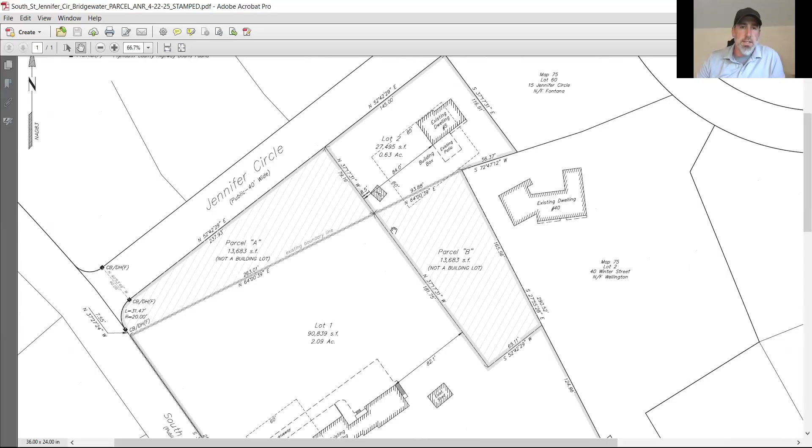Can answer any questions. So are there any board questions for Mr. Klum? Any board comments?

We did receive the staff memo from Mr. O'Brien. Mr. O'Brien, do you want to comment on it? No, I guess it was surprising to see this after the previous ANR, but once Luke explained it right there, it makes sense. Doesn't really affect anything from the previous ANR, so I'm okay with this. Okay, and both of those parcels are listed as not buildable lots.

All right, if there are any other staff or board comments or questions? If not, do we have a motion to endorse? So moved. Second.

Hold on, I lost my list. All right, so motion by Mr. McDonald, second by Mr. Haley. Is that correct? Correct. All right, so I'll take the roll.

Mr. Geller, yes. Mr. Pratty, yes. I was told that I might not be able to vote on this. Well, this is new business, so I think the only thing that you haven't sat in enough meetings on this evening would be 43R as well as Mansion Way. Mansion Way as well? Okay, yes, then yes. Mr. McDonald, yes.

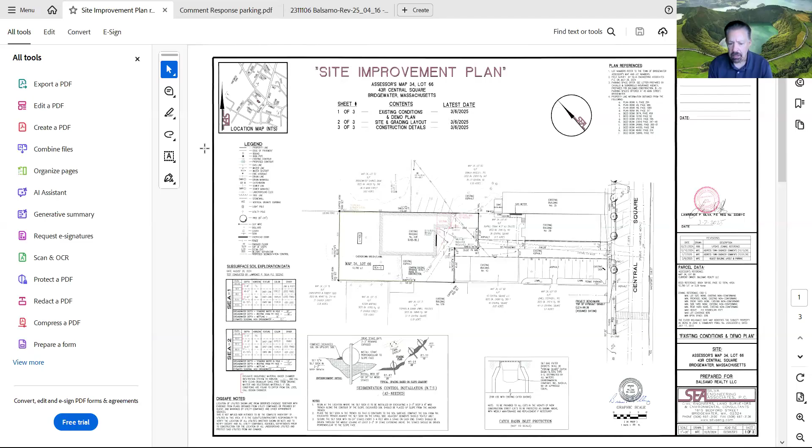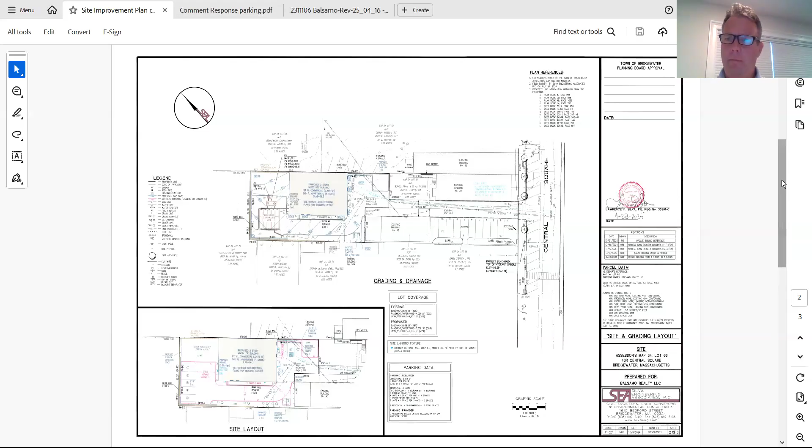We made sure our site plan was consistent with Matt's. Can you blow that up a little bit so people can see it better if possible? Yeah, I'm trying to figure out what you guys are actually seeing here. Hold on, it shows full screen with me. So I can probably change this. If you can zoom in maybe once more. Sure.

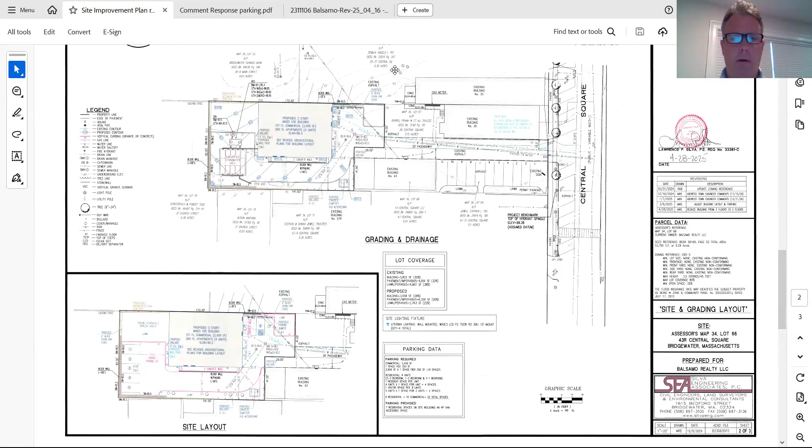Let me see. Does that help at all? No, my screen, I see it full. Bear with me. Let me stop sharing and reopen again. Well, that was pretty good. Oh, it was? Is that all right there? Yeah, what does the board think? I can see it a little bit better if that helps. A little better. That's strange, because I see it as a full screen. That's all right, go ahead. If people have questions we can address them, but go ahead. If you need me to zoom in on something, I can do that too. Go ahead, sorry, Larry.

So did you have a specific question, Pat? No, I think go ahead. I think you provided some updates from the last plan, so if you could, I think you provided the curbing.

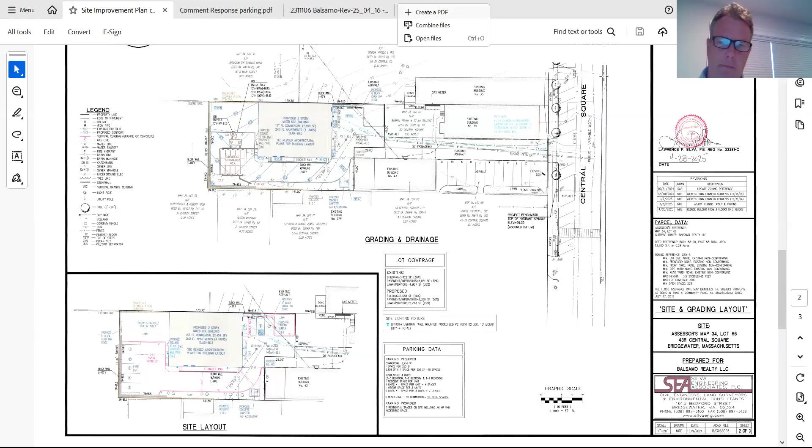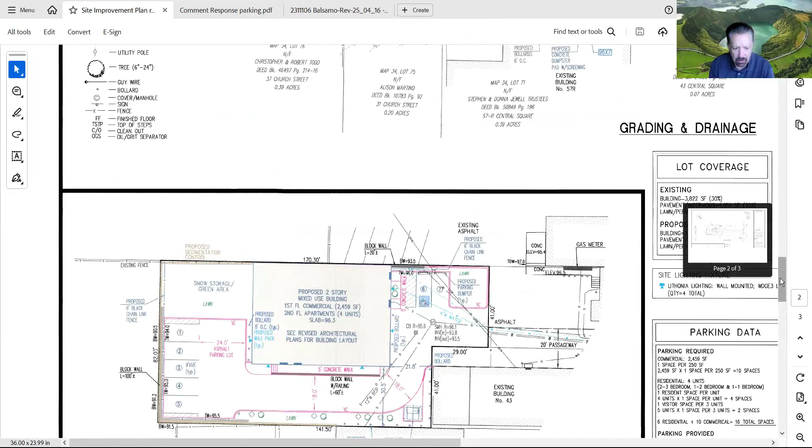Is that correct? Yeah, in the front there, next to space number 7, that area it was asked that we curb that area, so we added that to the curbing in that front area. So that has the vertical curbing there. As you can see, the note says vertical curbing, and then there's another definition in the legend that says that's either vertical granite or vertical concrete. The client asked that we be flexible about that, because whichever one he may have more access to in order to be able to utilize there.

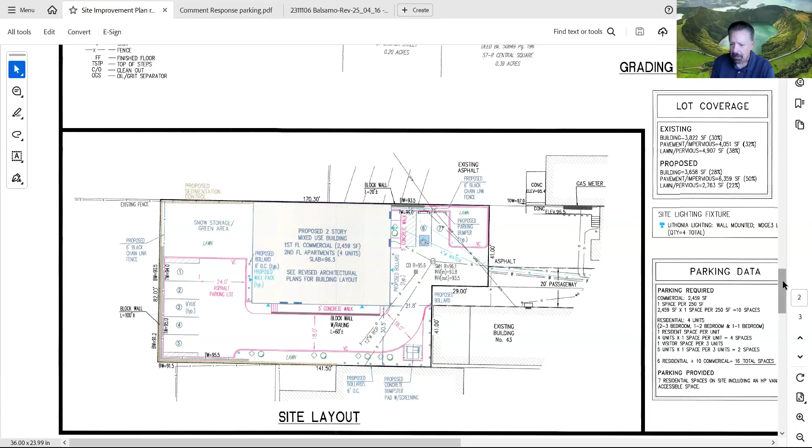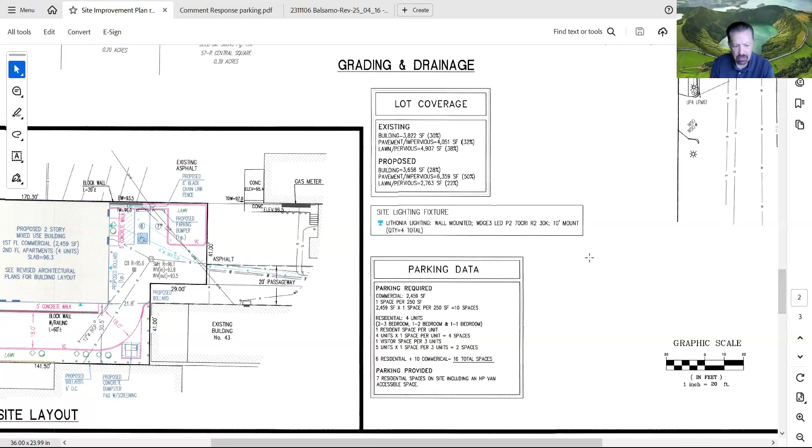We made adjustments. There is one little typo that I saw in the parking data, where it said visitors 1 per 3, it said 5 units under it, it should have said 4. Halfway down through that parking there, below the one that says visitor space, that one should say 4 right there. I apologize for that, we'll make sure on the final one that it says that. In essence, what's happened here is that we're providing for the parking for the 4 residential units, and then we have the accessible space in the front also available.

So there's 6 required for the 4 residential units. But what I submitted was a request or an explanation about the no-loss-of-parking provision in the bylaw.

So we're asking for the special permit to basically show that what's being proposed is not a loss in parking. There were attempts to try to get off-street parking to support a commercial use here, but our client indicated he was unsuccessful in doing that. And as such, we've gone down to the 2-story.

We're indicating that even though there are 4 residential units and there has to be 1 space for each one, the other 2, which are for visitor parking, could have signage that leaves them open for either residential or commercial during daytime hours, but after 6 it's strictly residential. That might help with the space out front, number 7, where that one could be actually available for that use during the daytime.

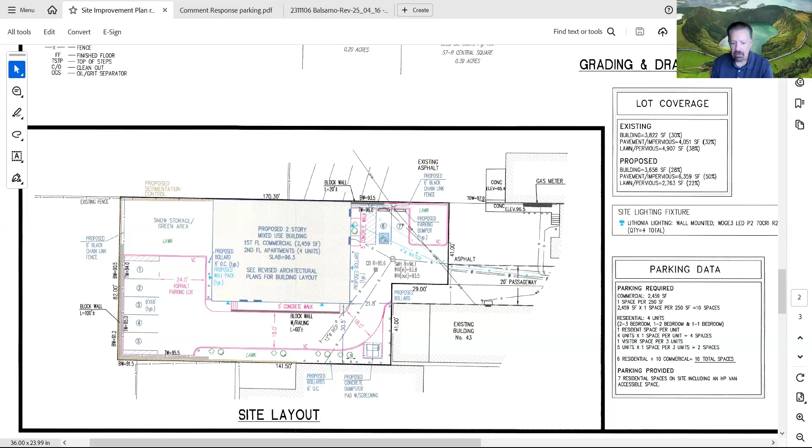It's been so many times that we've been through this. I don't believe that there was a specific outline of those plantings. I think that they were just shown as areas that would be planted.

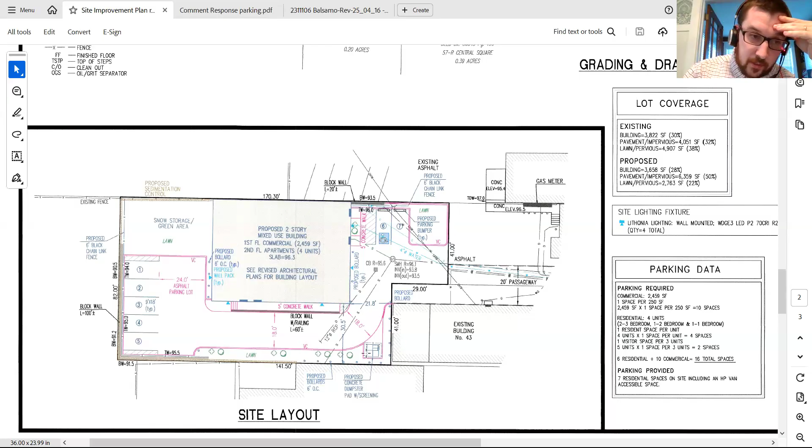Okay, just to refresh my memory, Shane, did we ask for a landscape plan? I don't think it did. I don't think we've asked for a landscaping plan. I think we've just been looking at other things, more small shrubbery, not so much shade trees. So I know that we've looked at it from a small plantings perspective, but nothing discussing any shade trees at the location.

All right. What about, Mr. Holmes, does anybody have any questions just on the updated site plan, and we can come back to it if we need to from the board?

I need to step away for 1 second. There was a huge bang on my house, I got to just take 1 second.

So I'll open it up to board questions for the applicant. Or do we want to wait till Mr. Silver's back? You can probably ask the question, and then if between Jim and I, if we don't know the direct answer, we can refer to Larry when he comes back, if that helps.

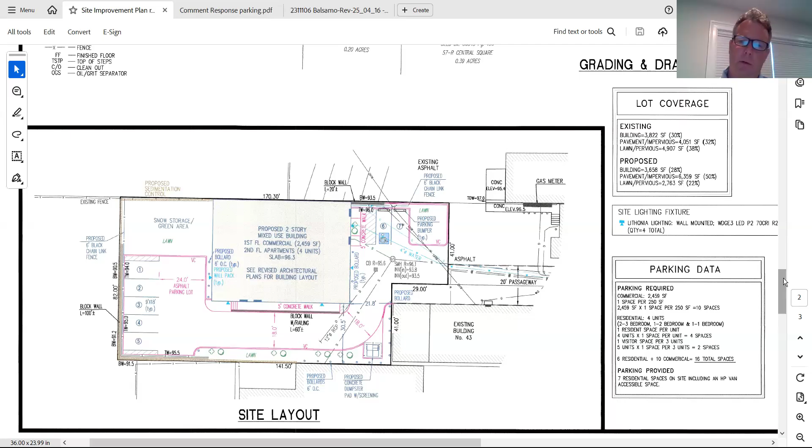So I had some questions on the right of way, Shane, just to make sure — last time we talked about the disturbance in the right of way for the utilities. I didn't see anything provided in terms of a summary of how that would be repaired.

I mean, I know we talked about keeping everything to one side, and that 10 feet would be completely repaved, and that could be a condition. But did you provide any specs on that, Larry, about what would be repaved and what wouldn't be repaved?

No, I think that Jim, Mr. Balsamo actually indicated what his plans were in terms of paving at the last meeting. But we did look at — wow, we got something happening here.

I apologize, there's something huge bangs that are happening right now. I thought you were in the Azores. No.

We did look at it, and we kept the utility changes to the best that we could on the second half of the 20-foot passageway. We tried to do that. They are difficult because, to some extent, where those water and gas lines actually are in the pavement are not clearly marked by the utility company — they give you a rough idea. But for the new line that we have to bring in, we kept it on the upper side, for the 4-inch water line that has to come in.

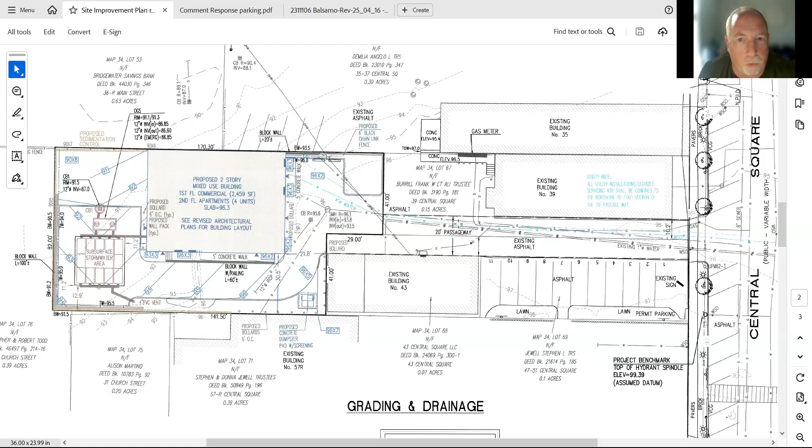So Chair, if I remember correctly, I think the applicant said that he would not leave a trench, that he would actually make it like an L shape if he had to, and pave the whole thing, not just patch it. That's correct.

So we did receive some correspondence, maybe that can come up later, about one of the potential right of ways not being correct, or the wrong deed that was presented to us, brought up at the last meeting. Did you guys look into that at all, or do we have the accurate deed?

The attorney is the one that provided that information to you. I think what was indicated was that when looking at the neighboring property, what was provided to you was an easement that's not germane to this. The actual easement that pertains to 47 to 51 Central Square...

Well, is that really what it is? I guess it's the 10-foot portion of the 20-foot right of way. So their easements, to the best that I can see, do not show that they have full use of the 20-foot passageway, but they do have use of 10 feet of that passageway.

If Mr. Jewell is on tonight, she might want to clarify that further, but that's what their deed shows. And I don't think that's what was provided to the board. I think a different easement was shown to the board.

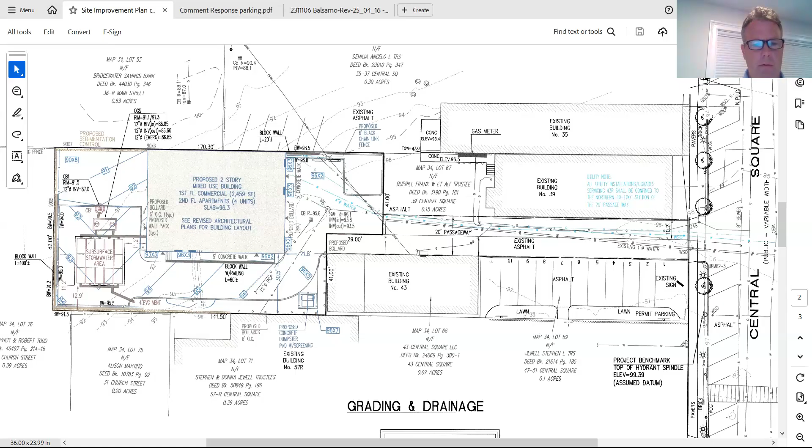There is a fence shown. There was an existing fence along that stretch. Is that a new fence now? Is that vinyl? Is that stockade? Is that listed anywhere in there? I don't believe there was any designated change in a fence on top of that was indicated to the board.

I think the wall was indicated. I thought there was a fence there to block, because cars would be parking right there and shining into that. Wasn't there a fence proposed on top of that? There's nothing that would be shining in that direction, because that's a vacant, grassed area to the rear of the property.

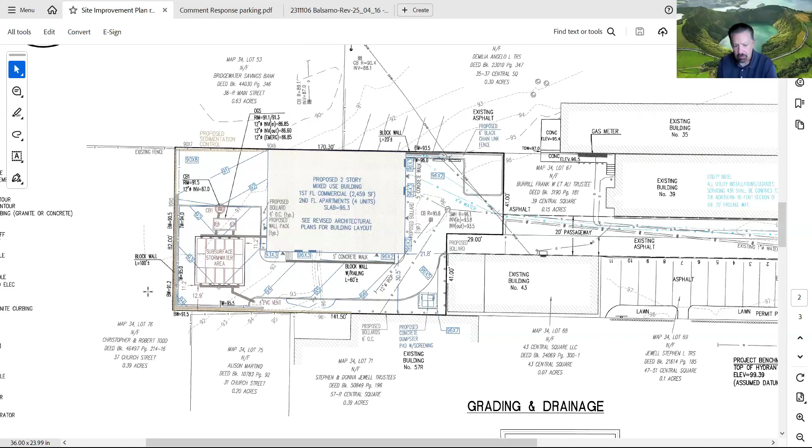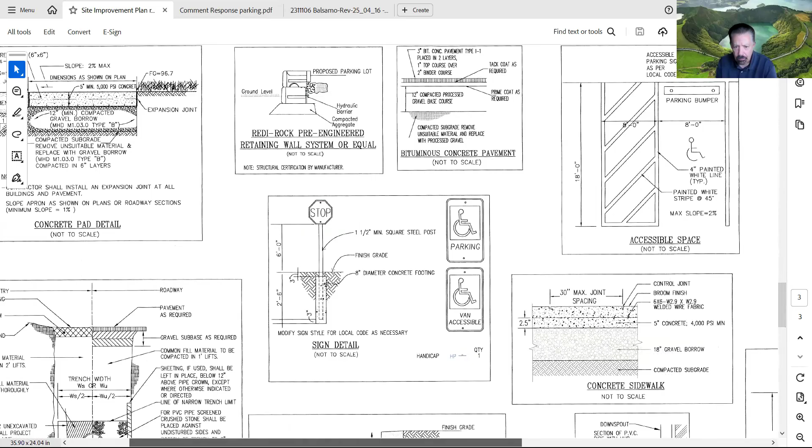I thought on the detail sheets they were showing some sort of slat or vinyl fence, some screening. If we go to the detail page, we might see whether it was actually called out on the block wall detail. The block wall detail just shows the block wall. Shane, where were you making reference to, a different detail? There was information, I think, on an old plan, because we were talking about off-site lighting, and that's why I couldn't see it on this set.

That's why I was looking. Yeah, it was on a previous set. There's a fence detail there, but it doesn't necessarily say in plan view that it runs along that entire parking area.

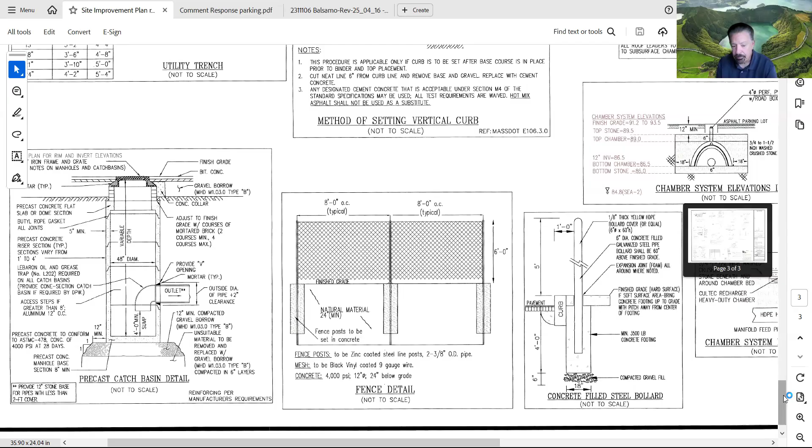Can I step in? On top of that wall there would be a 6-foot chain link fence with black privacy fabric. Okay, that's what I thought we saw at some point. All right, all right.

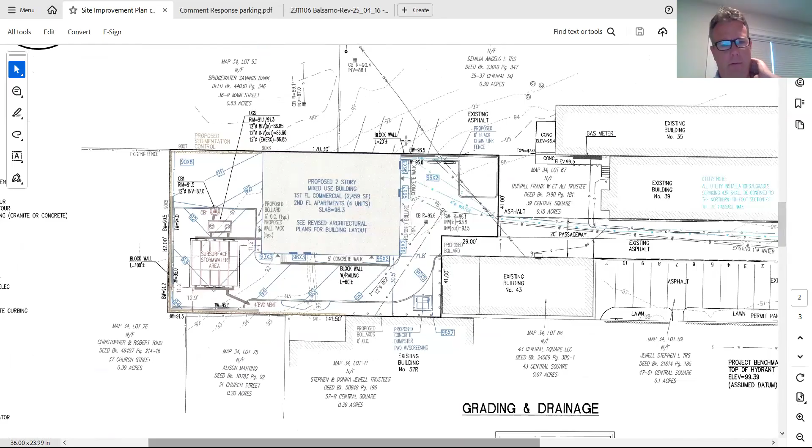And then more to Mr. Holmes, I know, and maybe for the public's benefit, if you could bring up... well, actually, before we go into those, I'll open it up to any other board member questions on the site plan.

Pat, could I ask a question? Sure, Mr. Praddy, go ahead. Larry, just very quickly, I'm not sure about this right of way, but I know looking back in older deeds that I had access to some time ago, some right of ways are specified for horse-drawn cart, some for foot traffic. Is there any designation on this right of way for commercial as opposed to residential, and must it be updated?

These right of ways go back a long time, and they talk about them as passageways. They're not that specific.

They were done and granted in a pre-automobile kind of time frame, but they've been in place and utilized long after automobiles came into use. Frito-Lay used to work out of this building in the back, and it was a furniture upholsterer. There were a lot of different commercial uses in here. I saw aerials myself of trucks that were in there, and there was a loading dock on the south side of the building that was utilized over its history. So it evolved from being whatever was intended in the beginning, or whatever was the means of travel, to just being a 20-foot passageway.

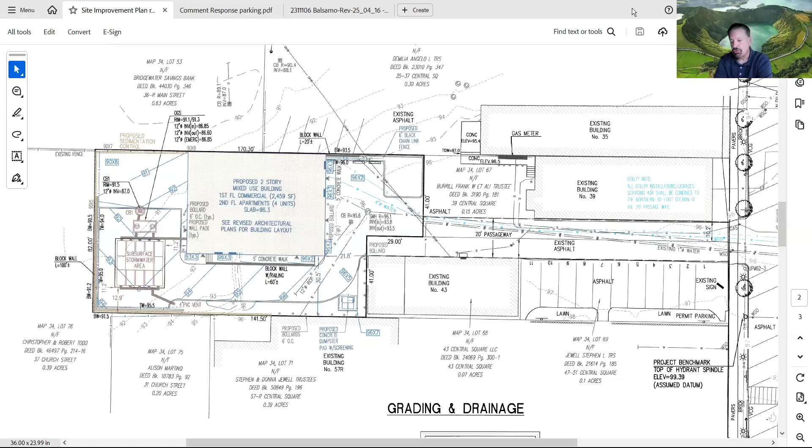But this residential aspect of this particular layout is new. There was nothing in there that precluded it. It didn't say 20-foot passageway for commercial use only. There was never that kind of detail. Well, there was no zoning for residential back there before, was there?

There was no zoning back at the time when that passageway was created. The standard under title is open and notorious use, and all of the uses that Larry has articulated constitute open and notorious use. So residential, commercial, it's been used for an extended period of time for access. I was just asking because I'm not quite sure what is true compared to what was originally done, whether there needed to be an update, but supposedly not. It says in use as in common with abutters, and there are residential abutters using it and commercial abutters using it. So it states that I can use it as they do.

Any other board questions at this point? Nothing at this time. No, I'm good, Pat. You brought up what I was gonna ask of the deed.

I don't know why I thought this, but I'm looking at Mr. Silva's letter. No net loss of parking, right? So for some reason, I thought there was an extra spot on here. I thought there were 8 spots, but...

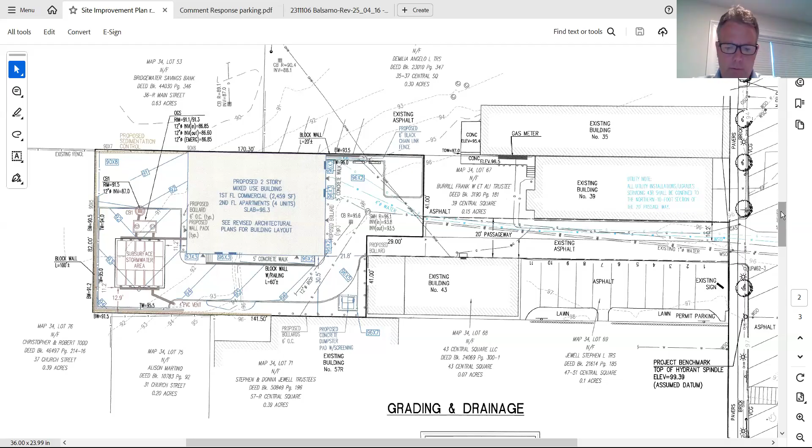Shane, does this meet the no net loss in parking in your opinion? I know you provided a letter on that. Sure, I would say that from all indications from past site plans, there was never really a strong parking layout at the site before. It looked like there were probably 2 or 3 parking spaces utilized for commercial as well as the overhead bay. I feel comfortable with that meeting those special permit requirements.

I think that the intent of the ordinance when it was formulated was to look at properties in the CBD district that have issues. We kind of look at open spaces, something that needs to meet the requirements here, whereas this property meets the open space requirements but takes up a portion of the site that could be utilized for parking, as we've indicated in the past. But in terms of utilization of parking on site, based on that and open space, I think the attempt to have as many parking spaces on site has clearly been tried to be met.

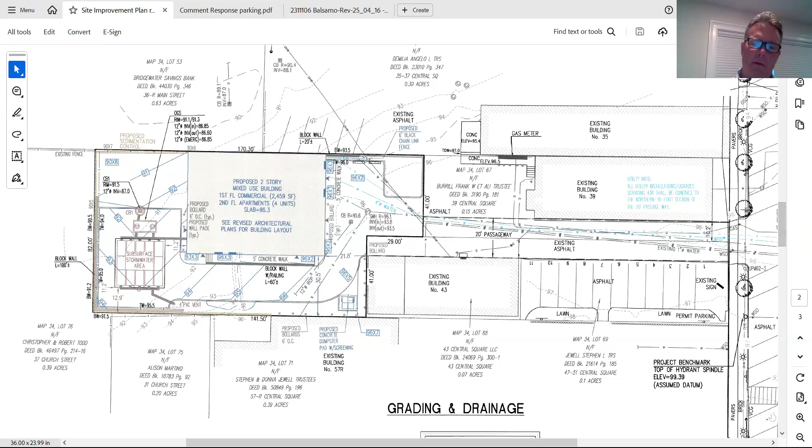Okay, all right, thank you. Any other site questions? Mr. Holmes, could you bring up the architectural plans? Sure. Could you go more to the outside? I know in the past you said you're thinking of this or that, but if we approve or consider approving a materials list, if it changes, it would have to come back for a modification. So is this the palette of colors and spec of materials - is this the final design of materials and things of that nature?

Yes, as far as materials, as far as the walls. Now, one thing that Mr. Balsamo and I have been talking about is whether there's actually going to be a standing seam metal roof or whether we go to an asphalt shingle. That's something we're looking into, and a big part of that is cost - standing seam metal roof is typically 4 times the cost of asphalt. As far as the new added second level, that's going to be a Hardie board type cement fiber board material. The color palette we've discussed, we think a lightish gray might be the best way to go, not making it too obnoxious of a color. It's just kind of understated in that way.

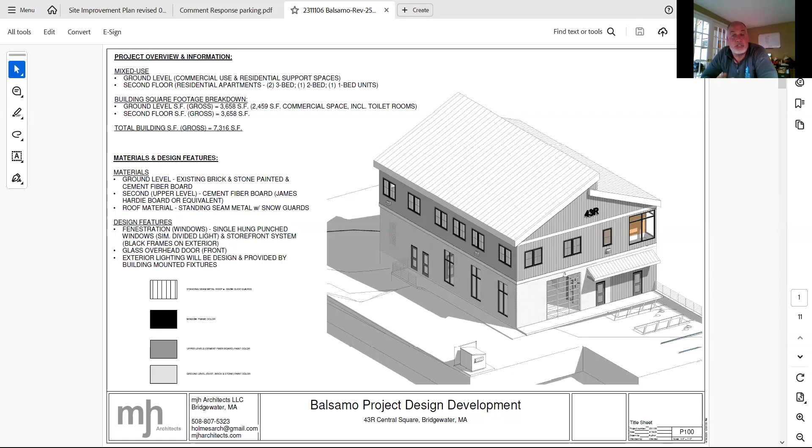One thing is, depending on what happens with the commercial space, I want to mention this. Right now I'm showing this garage with a glass overhead door, and just so everyone knows, this is an existing overhead door right now. We want to keep this because of the options it can bring for commercial use, having an overhead door. It's shown as glass just to show that if a certain type of use goes in there that can utilize an overhead glass door or have some fenestration through it, but depending on what goes in there it could also become more closed off, not a transparent overhead door.

Got any board questions on the architecturals? I could pull some other views too, if needed.

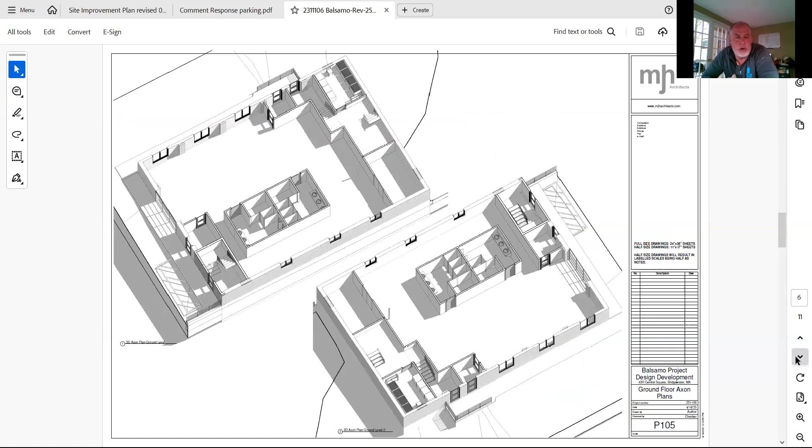Is there a need to go over this at all anymore? Does anyone think, or has the board in the past, vetted the building?

All right, any board questions on the plans? Nope, nothing at this time.

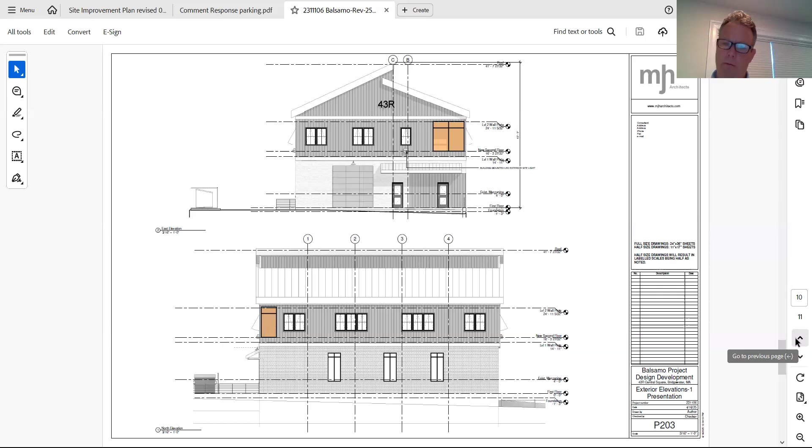All right, Mr. Tanzi, just before we go to public comment, it seems like in your latest letter they've addressed the drainage and other concerns that you had. Are there any outstanding issues from your department? No, there are not.

And Mr. O'Brien, did we hear back from the fire department? I know you made several attempts. Did we hear anything? I did not, as of this time, hear from the fire department regarding any comments on this project.

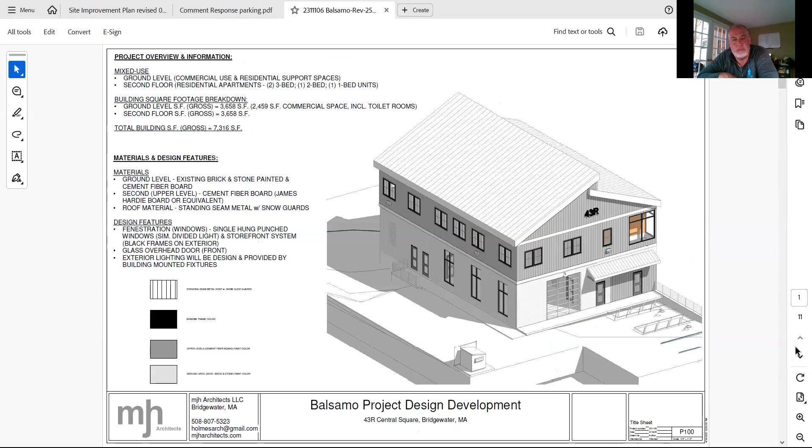Can I just jump in on that? I think Mr. Balsamo would want to as well. Mr. Balsamo and I actually met with the fire department, I'm not sure if you guys were aware of that, just to review everything. Thank you. The fire department had no concerns.

Their only request, and it's not definite, is that in the front landscaped area where we agreed to put a vertical curb, they might rather that be stone, so if they have to access building number 35, their truck can make that swing. That's the only thing they were talking about. We don't have a comment on that, so we can leave it the way it is for now. But that was their only concern; everything else they were fine with.

All right, I'll open it up if the board has any questions on architecturals or the revised site plan or anything like that.

Okay, and I know we did receive, I think, two emails regarding public comments. Is that correct, Shane? Was it just two? Let me be sure. It was either two or three. But I believe it was two. So hopefully everybody had a chance to review those. Yep, I forwarded it along to you guys.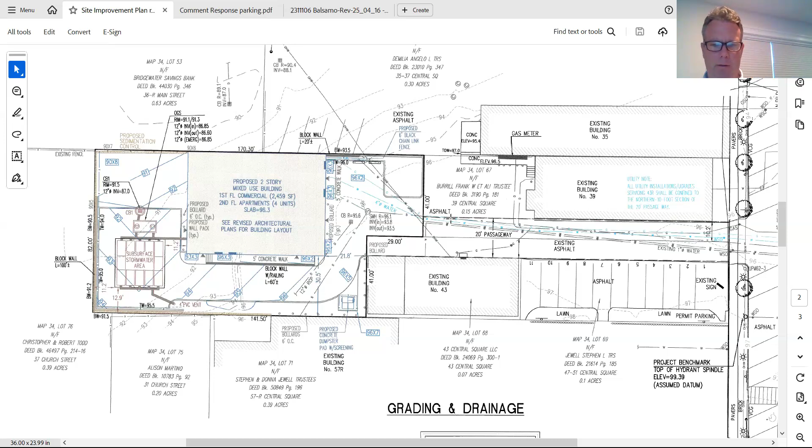All right, so I'll open it up to public comment. I'll have Shane help me manage that, Mr. O'Brien, and if there's anybody that would like to speak, you can raise your hand virtually, or raise your hand if you don't know how to raise it virtually. Please state your name and address for the record, and let's try to keep all comments respectful.

Sure thing. And I actually received three comments, with the one we received today, one the other day, and then one previous to that. But I have a chat from Tony Robinson with their hand raised. Tony, if you would like to speak.

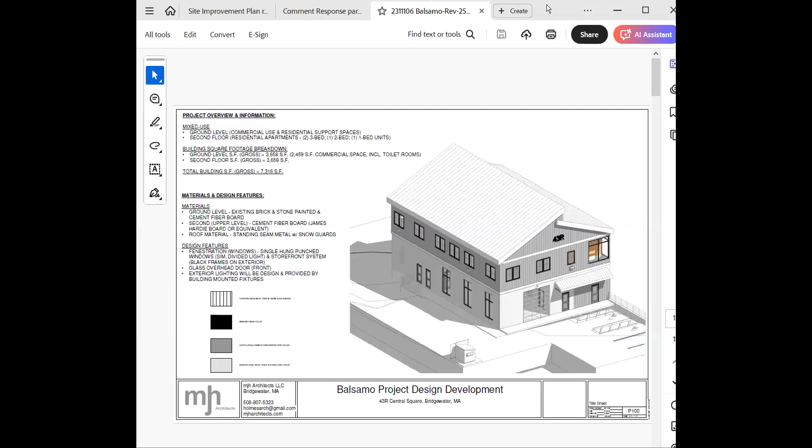Okay, and I also know that when we last talked at the last meeting, I questioned whether the applicant's attorney had reviewed the correct right of way, and Larry Silver and I talked about that, and we identified that it should have been for 47-51 Central Square, not for 57 Central Square. So has your attorney reviewed that to know what's allowed and what isn't allowed?

My attorney has reviewed it and submitted a letter to the board. Okay, how may I access a copy of that letter?

Jan, is that on, do we have that online? I have the original letter that Attorney Bob Pellegrini had sent to us. That was the one dated in January, I think. That would be, I believe, correct, January or February. That would have been the one with the incorrect parcel listed. It should be for the book and page, book 21614, page 185. The one in that January packet was not that parcel.

Mr. Silver, Mr. Holmes, do you want to speak?

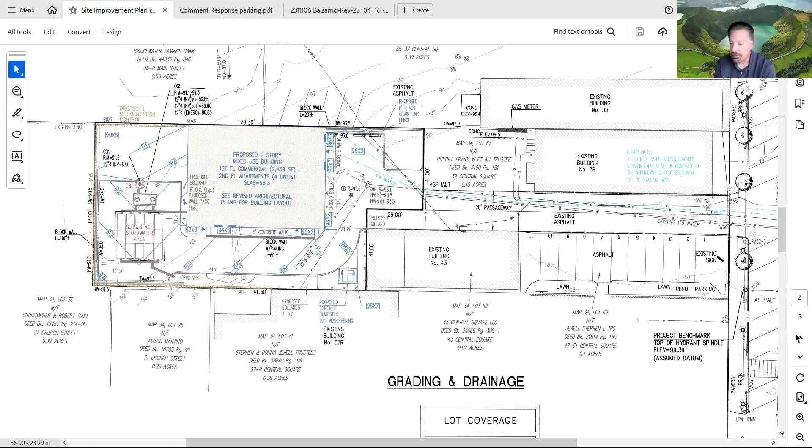That's actually, I agree with what she's saying. There was, I believe, an incorrect reference in that. It referred to another easement that's not related to this project. But to go back to the other question, if you see what's on the screen now, in where the building is for number 39, there's a note up there about all utility installations related to 43R would be in the northern part of the 20-foot passageway.

And then just the last part, I would just want to reiterate, our concern for vehicle and pedestrian safety in the proposed project still remains a concern, even though I appreciate the fact that the size of the project was downsized. But based on that concern, I just want to be open and upfront and tell you that we are considering adding a gate at both ends of our right of way. We know that if we decide to do that, we have to provide access by a key for your tenants or customers to be able to lock or unlock both gates.

But I didn't want to catch anybody by surprise should we decide to go ahead with that. That is allowed by law for that parcel. My deed says unobstructed. Please let me just finish. Unobstructed means we cannot lock the gate. We can put the gate there and provide either keypad access, an unlocked access, or a padlock with a key. We can't lock somebody out, but we can provide them access. I just wanted to state that because I don't want anybody to get caught by surprise down the road should we decide to do that.

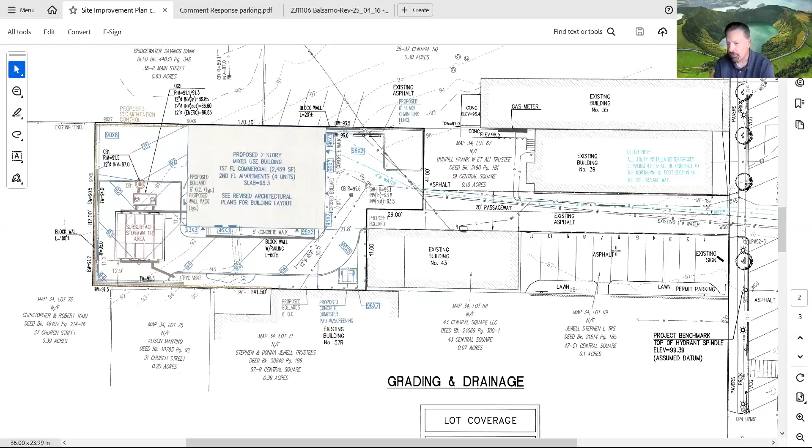It would be looking down towards the project. It would be the right of way that runs along the left-hand side behind the parking spaces, behind the 11 parking spaces that Mr. Silva pointed out earlier, correct? Correct. So the way those cars now, they back out onto that section. And just for the record, it's impossible to back out into a 10-foot right of way without going into the other section in order to go in or out of those spaces.

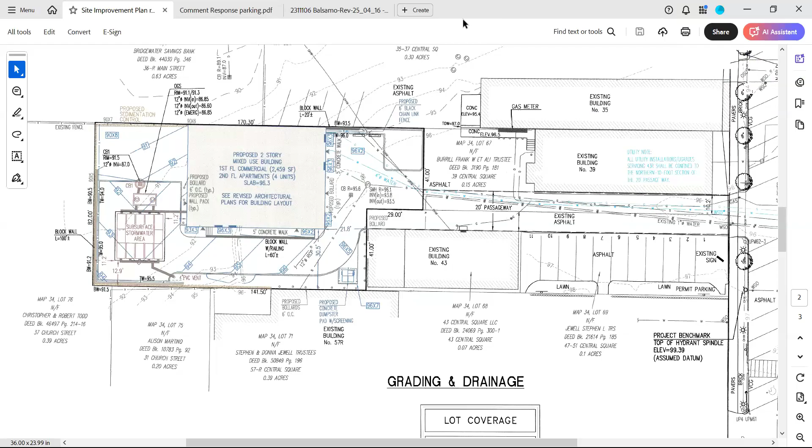Well, it's a little bit more than 10 feet if you pull all the way up. And I knew that was going to come up, and I tried that, and I'm not the best parker, but it worked for me. But anyway, I just didn't want to catch anybody by surprise, and I think it's necessary to look at the correct deed first. That's all, thank you.

Mr. Silva, if I get, there was an earlier comment, Mr. Moore is still on the line here. There was an earlier comment about where would someone park in order to go to a use that's here or whatever. I would suggest that, he knows the Fellowship Lodge, and they don't have much designated parking, maybe behind their building, a few spaces. But if they have an event in their place, people are going to park somewhere else. And I think that's a fair statement, that people find a place to park when they want to go to something they're intending to go to. I don't think this is any different, except that the residential component of it is being provided with parking spaces to meet the regulation.

Thank you, Mr. Silva. We have Mr. Sylvia looking to speak. Shane? Yeah, he's good to go. John, you're good to go. John Sylvia, 43 Central Square. Can you hear me, Shane? Go ahead, Mr. Sylvia, we can hear you.

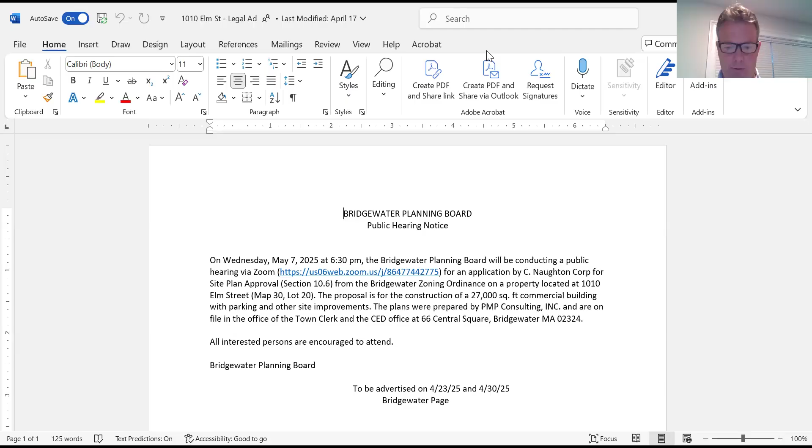This was posted by the Bridgewater Planning Board and advertised on 4/23/25 and 4/30/25 on the Bridgewater page. I believe that's the Brockton Enterprise, is that correct, Mr. O'Brien? That is correct, it's posted in the well-read Brockton Enterprise.

Okay, so you confirm that we have received everything from the applicant, you did send out a packet with a memo. Yep, Mr. Tanzi. I did not see... the one thing I didn't have, we have Mr. Tanzi here, Mr. O'Brien, the one thing I didn't see is a review from Mr. Tanzi. When I clicked on the Bridgewater town comments there were two PDFs and they didn't open.

So I don't know if you can have that prepared. I'll let the applicant respond and provide their presentation, and then I think we can present it too, because one of the things associated with this project is that there's an NOI filing at the same time, so things are getting kind of mixed up in between. But I'll let the applicant explain that process as well.

All right, so we'll turn it over to the applicant at this point and their representatives.

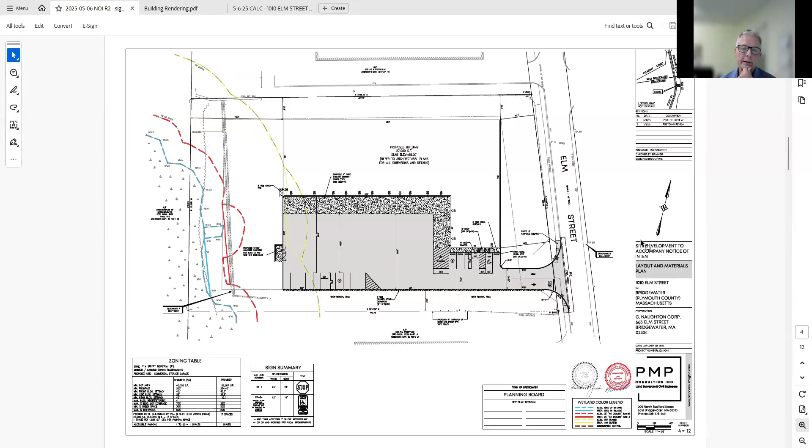It's a 2.4 acre site in the Elm Street Industrial District. You're looking at it there. It's a 27,000 square foot building with associated parking and pavement to go with it. The site right now is mostly clear, sloping approximately 5 feet down from Elm Street down to the wetlands in the back.

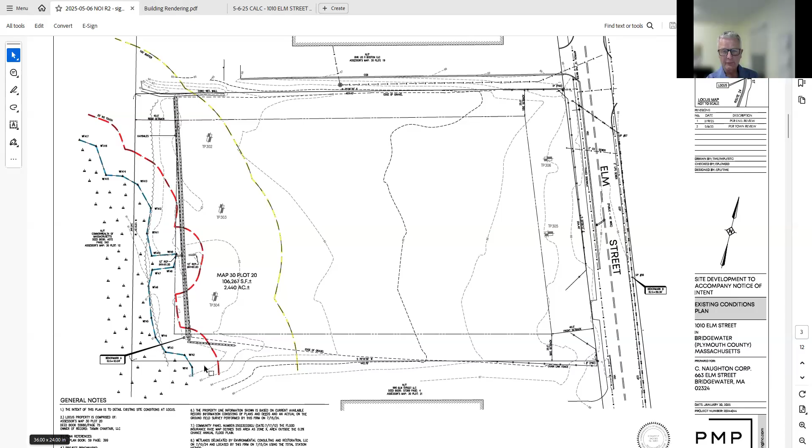It's currently being used by the client for material and trailer storage. The wetlands along the back of the property were delineated by Environmental Consulting and Restoration back in July, and field located by our firm. The building itself, Sammy go back to that layout, will have 10 bays to store vehicles in, along with 2 wash bays. So there'll be 12 total bays, and 2 wash bays included in that.

The bays will be used for vehicle storage. Basically, Mr. Naughton owns a property down the street where he runs his business out of. This will just be to store his trucks at night, bring them into the wash bay, clean them up, and then store them. The building's big enough so he can back the trucks in with trailers on them. In the summertime, there's storage for his winter operations, which would be sanders, plows, things of that nature.

There'll only be 1 employee in the building during the day. He'll just be a mechanic on site in case a truck gets broken down during the day or whatnot, and he'll fix that and wash the trucks at the end of the day and park them in the building.

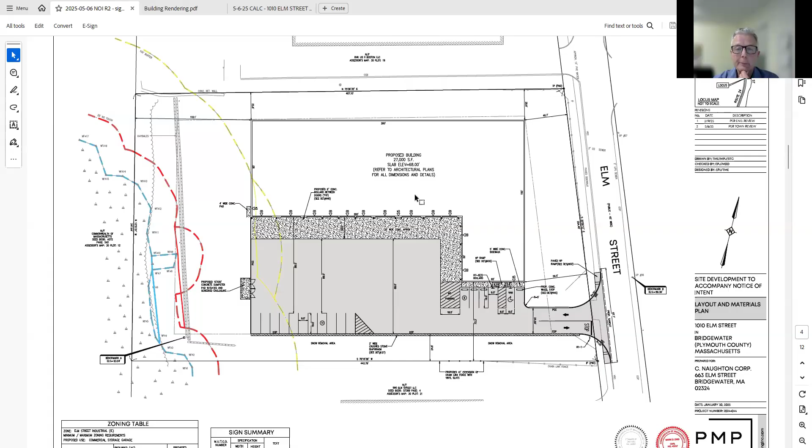The building has floor drains, one in every bay. They'll be connected to an oil water separator out in front of the building, and then that'll be gravity fed over to a sewer manhole, and then it'll be force main up to an existing connection just off the street up there.

We are, as Shane alluded to, going in front of Conservation Commission at the same time. We're just about wrapped up with them. Mr. Tanzi has looked over the stormwater report and the stormwater plan. He had a couple of issues on that, and we sent him over a letter addressing all the comments today. I know he probably hasn't had a chance to look at it, but we believe we've addressed all the comments on his letter, which we received, I believe, on the 2nd.

That's about it. I mean, I can answer any questions that you may have, but that's just a quick overview of the project. Thank you, Mr. Jacobs. And maybe Mr. Tanzi can weigh in on this as well.

I was looking at the site, and it seems like the drainage is basically just sheet drainage, pitched away to that swale, so to speak. Correct. So I guess my question is, when you don't have the traditional catch basins, what pretreatment is there for oil, gas that may be leaking out of a vehicle, things of that nature? If it doesn't go through a conventional storm drain with a hood and it goes directly into the soil, how does that prevent groundwater contamination?

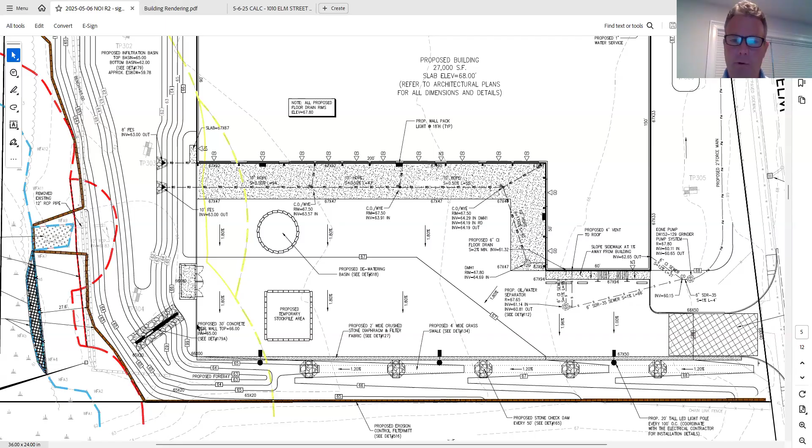I'm just concerned, are there enough safety measures in place, because typically most projects we see have catch basins with curbing that can contain that, and there's hoods and oil water separators and things of that nature that would protect the groundwater in that area. I'm not saying this is wrong. I'm just wondering, is this design appropriate for this use in this location?

Okay, well, I'll let Mr. Tanzi comment on that. Yeah, I see where you're coming from, Mr. Chairman, and your concerns are valid. However, it does conform to the rules and regulations. They do have an oil water separator, an MDC oil water separator, for storage of vehicles inside the building.

If there was a spill or rupture of a tank as truck traffic is entering into the facility, it will be captured in that diaphragm. The diaphragm will have filter fabric where those hydrocarbons would be caught and contained. It would require some immediate action, removal of contaminated stones and the filter fabric, and of course it would have to be replaced. Most likely you'd have to test down 6 inches to make sure there isn't any residual hydrocarbon, and then the pea stone diaphragm would have to be reconstructed.

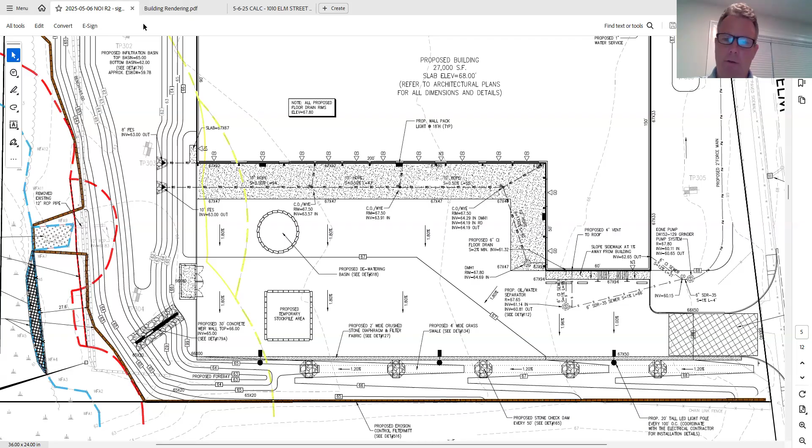Other board members, questions, comments? Yeah, if I may, Mr. Chair. So I'm quite familiar with the Naughton Corp, and the capital materials as a whole.

Mr. Jacobs, did you say there was going to be a couple washing bays on site? Yes, and those are intended to wash both the truck body and the bed. Is that correct? Yep. And where would those drain into? They would drain into the oil and water separator out front. We have a detail on that. If you'd like to see it, but it goes into the oil water separator and then flows into the sewer manhole out near the entrance, and then force main up into the street.

So, excellent. Mr. McDonald, the washing happens inside the building? And there's floor drains, correct? Correct, yep, there's one in every bay. And in that floor drain system, I'm assuming the water that is captured and contained there goes back into the town sewer.

Is that correct? Yes. Is there any kind of filtration system on there to capture things like arsenic, heavy metals, PCBs, things that will be in the material that these trucks haul? That's what an oil and water separator is for. So that's ready to do that kind of thing. Okay, excellent, thank you very much. Thank you.

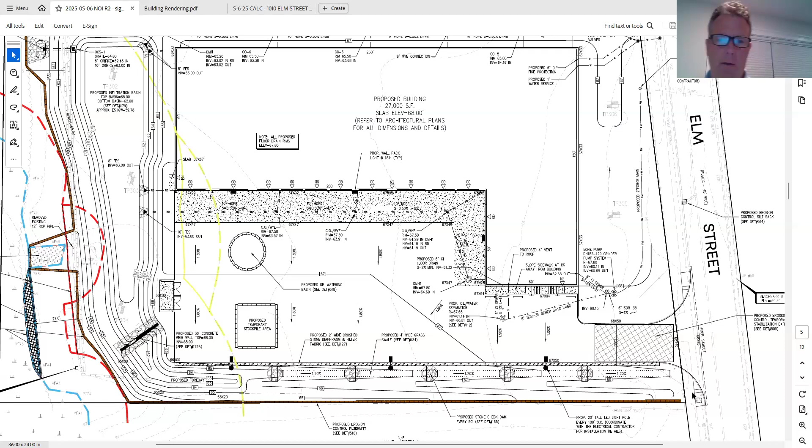Any other board questions at this point? So everybody's participating in this hearing, so anybody that has a question, as far as the board goes. Yeah, not the runoff from the truck beds - that was really my only concern, but sounds like that's all taken care of.

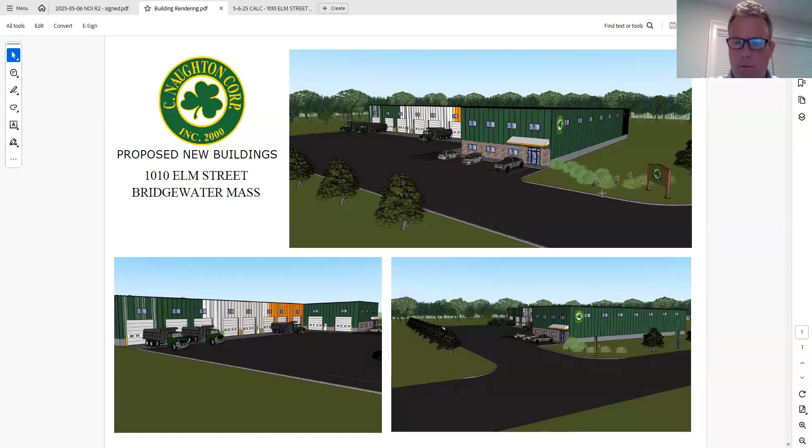And we did receive an architectural plan, correct? Yeah, we have elevations of the building if you want to see that. That's basically what it would look like. And I did see there was a landscape plan that called out red maples and different things across along the front of the street. Correct, yeah, we have - there it is. And we have a chart as part of that plan to show you what those are.

Now, how does this type of drainage work? I mean, the snow cannot be - there can't be a berm of snow left along that edge, right? That all has to be removed, otherwise the drainage won't function. I'm not sure what you're talking about, Mr. Chairman. Oh, down the south side, so how it sheet flows off. Yeah, as long as the snow is stored on the other side of that diaphragm, it would be fine, because it's just going to go into the swale. It'll melt, go through the swale, through the check dams and down into the basin.

All right. Any staff comments or board comments? How about public comments?

We have Janet Hanson in the chat. Mrs. Hanson? Hi, Janet Hanson, Pleasant Street. I still can't, as always, I no longer have that raise the hand feature. I don't know why.

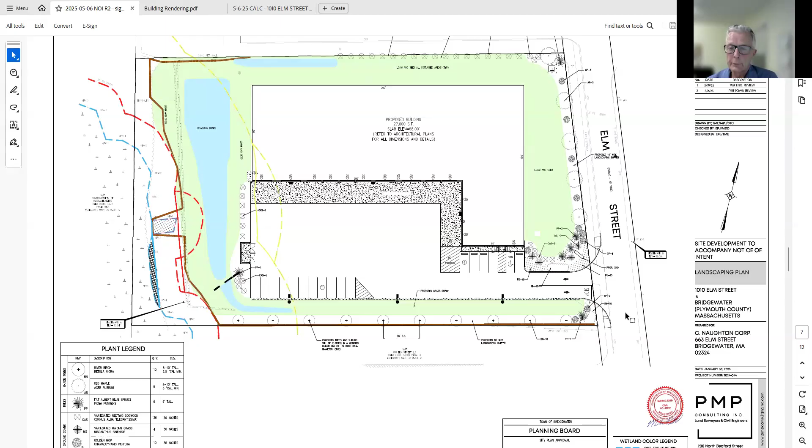Mr. Chair, if I may just elaborate on that. So we've been to two meetings with Concom. At the last meeting, they voted to send it out for peer review, so LEC Environmental is looking at it now. We thought we'd have their comments back in time for tomorrow night's meeting. We are on the agenda for tomorrow night's Concom meeting, but we have not had the peer review letter back, so we're going to ask for a continuance with Concom for tomorrow night, and hopefully we'll get the peer review comments back, address those, and get back to the next Concom meeting.

Thank you. Is there any other public comment at this point?

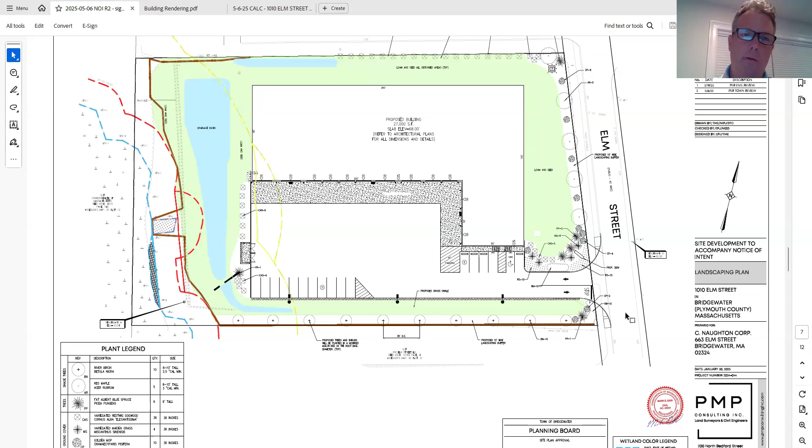So, Mr. Jacobs, is it your intention to ask us to continue this to May 21st in case you need to make any adjustments to this plan? Yeah, I think that would be the best thing to do. Then we'd have some answers from Concom. We'll make those changes and get back to you guys on the 21st.

I've also talked to the conservation agent, and she said she could provide the peer review to the planning board staff. I made her aware of past violations this site probably had. Something came up in the peer review process about whether the planning board was aware of any site plan work done prior. I indicated we sent a violation letter about a year ago, that the project would require site plan review based on the work being completed. I also mentioned I had met with Mr. Jacobs about a project similar to this, and we discussed it. So moving forward with this site plan review would withdraw any violations we currently have regarding the applicant not providing us a site plan review.

All right, so Mr. Jacobs and Mr. O'Brien, do you feel we should keep this open in case anything is needed from that peer review letter or needs to be changed on the final plan set? I would think so. I'm fine with that.

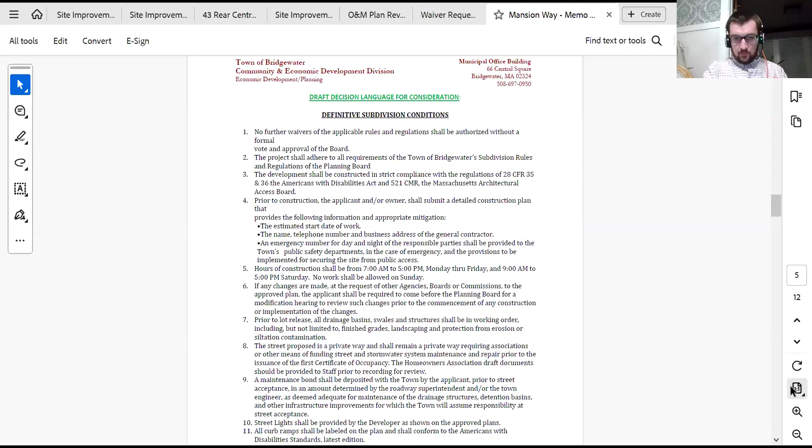Is there anything else in addition to the normal conditions that Mr. O'Brien? I'll share them on the screen just so we can look at them. What year was this approved?

This was approved in 2022? This was approved in 2020. So this was approved in June of 2020. Mr. O'Brien, were there any special conditions attached when it was approved originally?

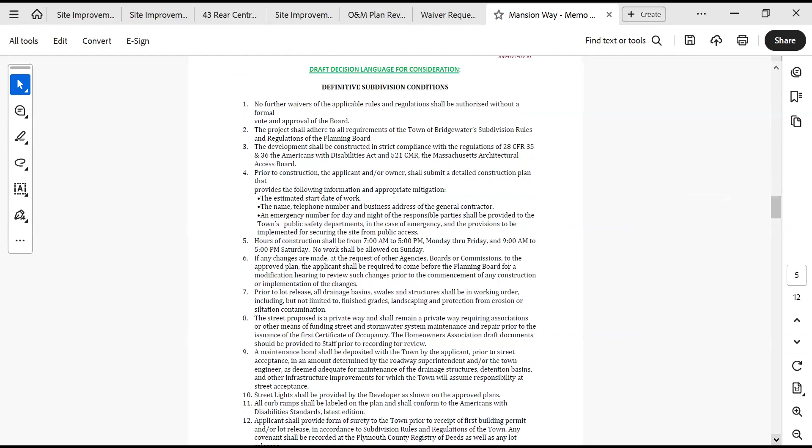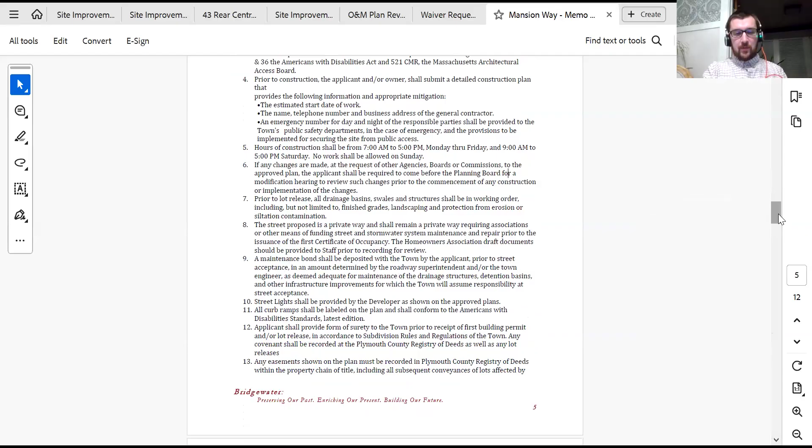There was, I can pull those up, but it was specific more so to if an additional lot was created that the applicant pay $500, and some of it wasn't really applicable to this one. I can provide that as well. I don't know if I provided that initially, but what I did include was making sure that

the subdivision roadway remained private in perpetuity, and I would say the most pertinent one from that last approval was there was language that there will be no clearing of trees by the applicant outside the boundary of the sediment and erosion control plan. So the difference is it would refer to the sediment and erosion control plan rather than the prior approval.

And Shane, the other thing we have to make sure is in here, and I don't know, we haven't done one of these in a little while, but we have to make sure that the homeowners association is established and runs with the deed to outline the responsibilities of the... Sure, you can work on that later, but we can add that.

We do have to make sure that the homeowners association is established prior to any building permits, or at some point before anything's sold in there, that outlines the responsibilities, outlining that it will remain a private road in perpetuity and the responsibilities of the HOA. I would just correct it in terms of prior to being sold to something more applicable that we can control, whether it be a building permit or.

Well, we actually have the language in zoning, so if we can pull it right out of zoning. No, I think, yeah, in our subdivision rules and regs, I think we amended that from prior to sale to something else, prior to a building permit or. Yeah, in all indications, they would still have to, if it's not specific in this decision, we can specify it, but everything within our subdivision rules and regulations, this decision still has to meet the requirements for. Okay.

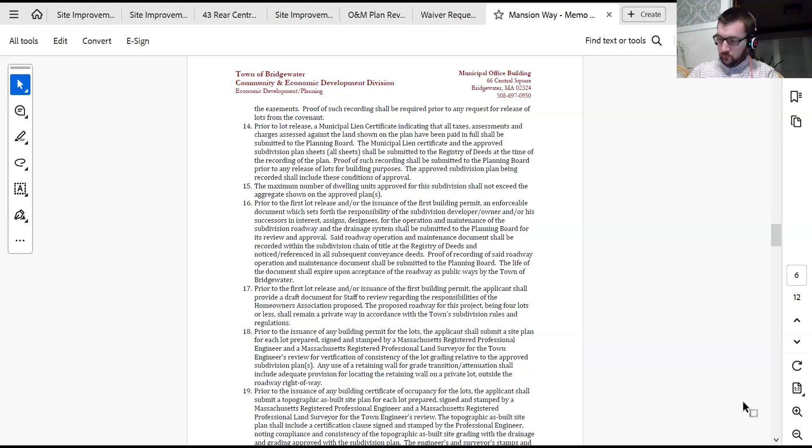Now, the other thing we should probably put into this decision is, they have to, so the HOA, the street tree compliance, and they need to meet with the water department prior to construction. One thing I didn't see on this is whether there's looping or a hydrant provided of the water line.

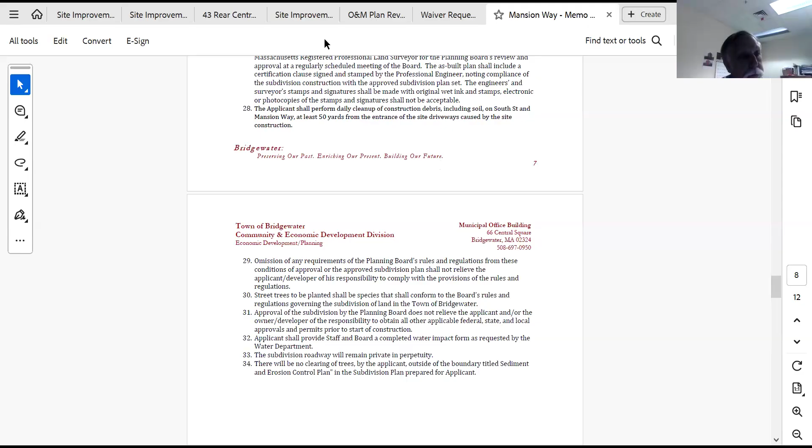Scott, can you answer that? There is a hydrant proposed at the entrance to South Street and Mansion Way. And have you done a water impact form, and have you discussed the water line design with the water department?

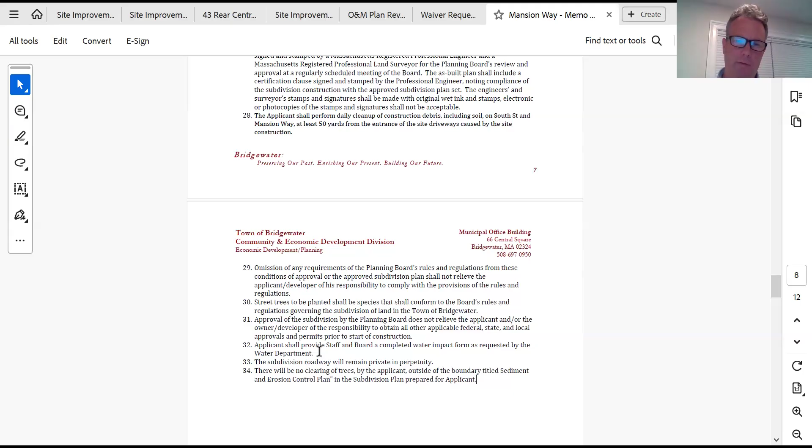No, but I believe the water department did receive copies of the plans. Additionally, a completed water impact form is a condition of the decision. I just want to make it clear that we're not approving any water system design as part of this. That has to be worked through the water department.

Sure. So we can add something about that, an impact form, and working with the water department too, because the water department has been asking for looping lately. So I want to make sure that's addressed in the decision plan. So HOA, street trees, water department.

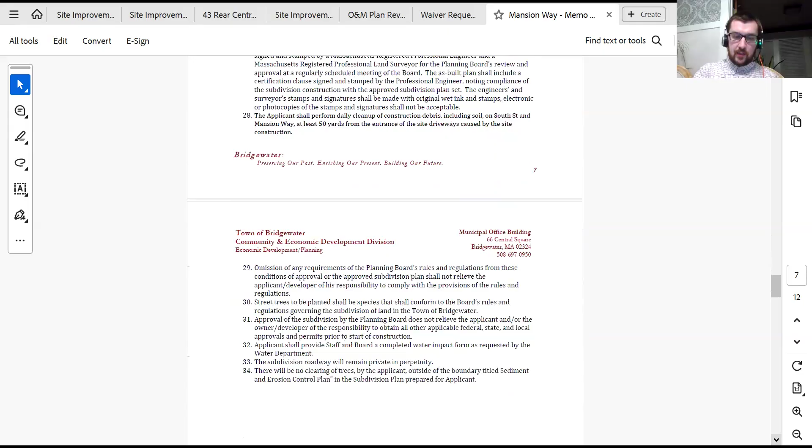Approval. Is there anything else the board can think of that we should consider in addition to the normal? Isn't street trees already covered on number 30? That's street tree types. So what Pat's saying is the plans will be amended. So that's 30 specific to species, but I could amend it to say street trees shall be planted throughout the site and that the species shall conform to rules and regulations, at the proper intervals as indicated.

Sure. So do we have anything else we would like to add to Mr. O'Brien's decision letter? Nothing from me. It's like a blank check, people.

All right, so do we have a motion to either approve or deny the project? I'll make a motion to approve with all the added conditions, that being the HOA, the street trees, water department approval and design, and water impact form. Do we have a second? I'll second, by Mr. McDonald.

I'll take the roll. Mr. Geller, yes. Mr. Haley, yes. Mr. McDonald, yes. Alrighty, thank you, Mr. Rogers.

We'll get that decision letter out in probably a week or so, Shane, right? Yep. Let us know about covenant, surety, all that jazz. Okay, thank you very much for your time.